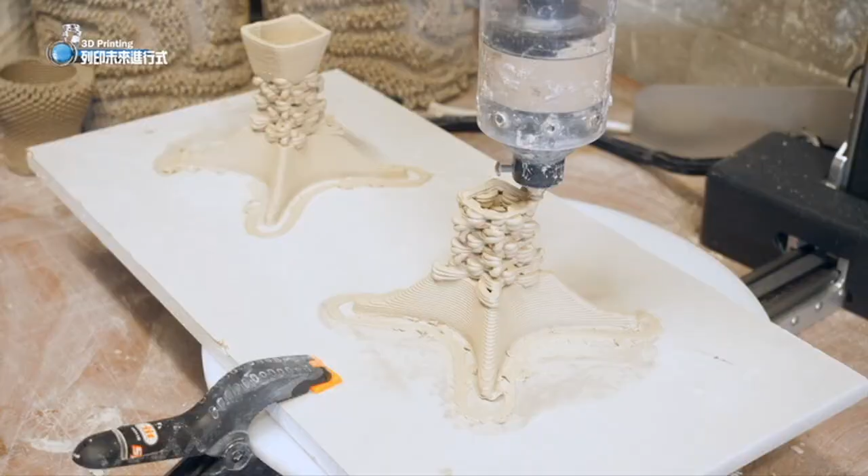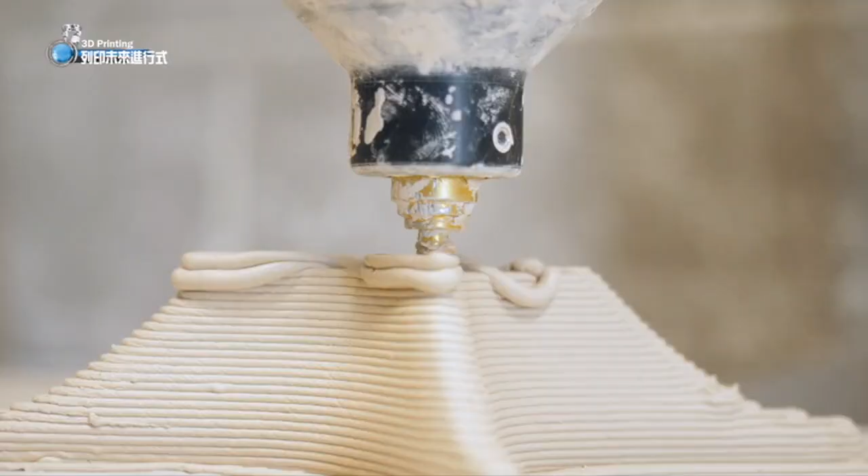So all these objects are made out of clay. And the reason we're choosing to use clay right here is because it's extremely durable and long-lasting, and it's a recycled material. So we're able to use waste clay from, for instance, ceramic students making objects. We can take the clay that they didn't need and then make all of these objects. So it all just kind of depends on exactly what you're trying to make with the given material.

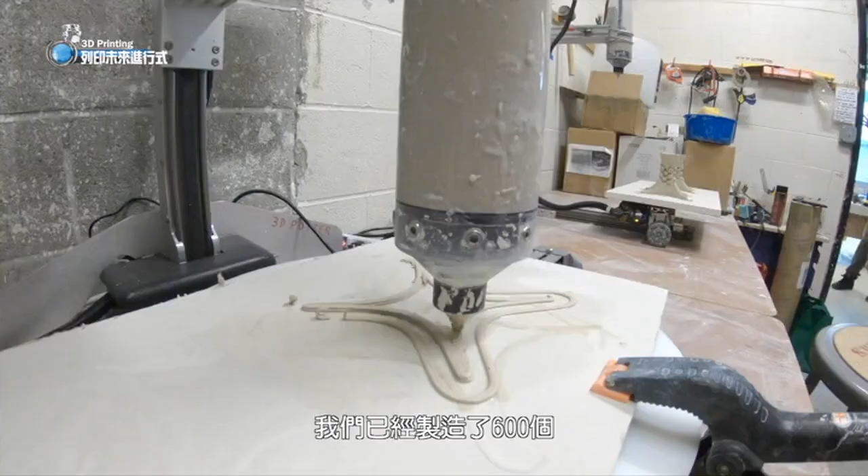Are these what you're now currently making? So right now, all of these objects are to help rehabilitate coral reefs. The reef has died in some areas due to climate change. The coral has succumbed to ocean acidification, basically. So what we're doing is making these objects which new coral can begin to grow on. So we've made 600 of these, and scientists around the world will distribute them in the ocean, and new coral will hopefully grow on them.

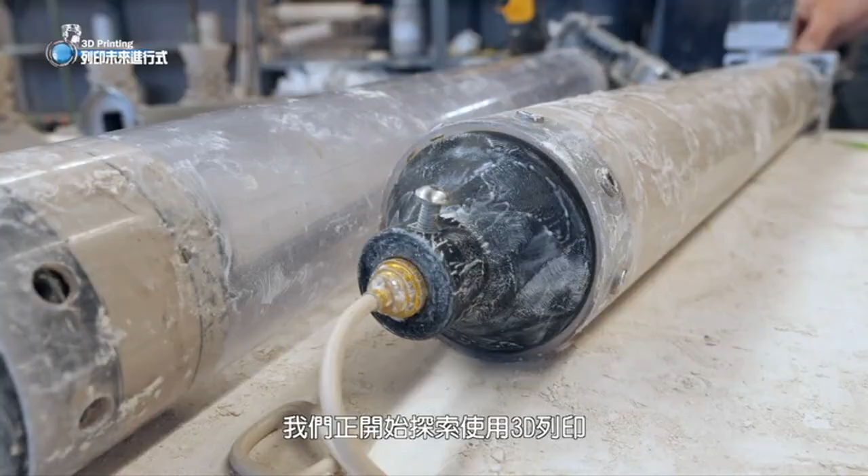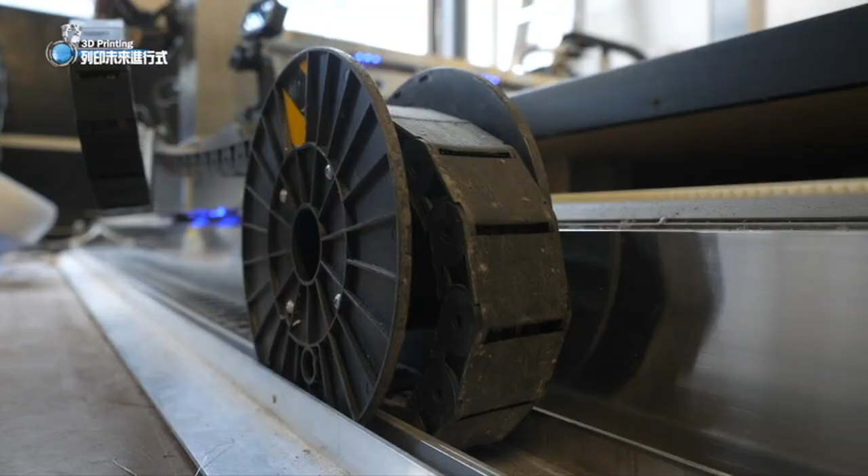Well, I think, as you saw with the 3D printed cabin, we're just beginning to explore the possibilities for full-scale construction with these tools. And in our case, we're trying to make modular systems, so you can make roof tiling that's all 3D printed and produced very quickly. So I think all across the industry, people are getting excited about these tools, especially as the materials become cheaper, which has always been one of our focuses. And I think you can also see in everyday architecture and design studios, almost everybody is using a 3D printer now just to bring their ideas to life very quickly. Before you used to have to spend days making some model to explain what you were trying to create, and now you can just design it and print it and then talk about it.